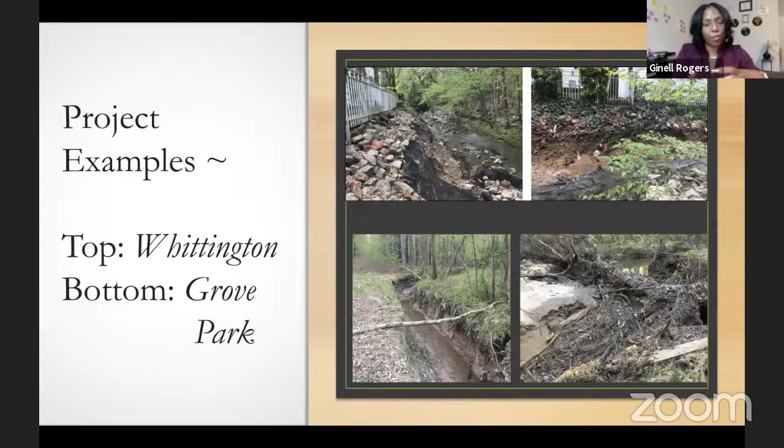Currently we have a Whittington project that is funded on the state level, doing water restoration, and the same with Grove Park. These two are HOA communities that we are contracted with, again with the state and also current contractors, to be able to do restoration work with these streams.

We also have some educational programs that we contract out as well. Currently, one is funded through the Triangle Community Foundation. This program is located in Orange and Chatham County, and this is our outdoor science lab.

Next, we also have a Beechtree Black Creek restoration project, and we currently have partners with Wake County Soil and Water District, as well as our partners Kris Bass Engineering and Fluvial Solutions. They help us do the groundwork there, and we are funded with the North Carolina Land and Water Fund, the North Carolina 319, and also the HOA match.

One of the questions I hear a lot is how does one get in contact with us regarding a potential project or need some assistance with a project? Our council members consist of a representative from each county, as mentioned earlier today.

Normally, the council members will bring potential projects to our board meetings. We would talk about those particular projects and what funding may be available to help assist with the particular project you need assistance with. All of our council members are spread out across those 10 counties, but we're all skilled in the work that we provide to the community. Each council member understands that there are different fundings available to carry out your project.

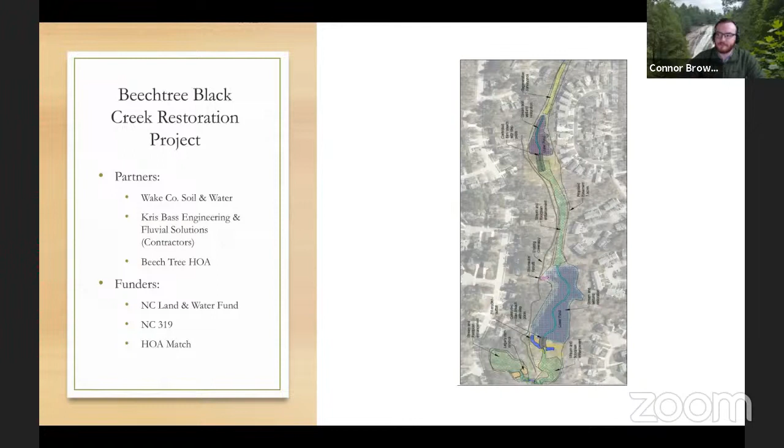Definitely, thank you for that. We don't do a lot of the hands-on work as far as understanding all of the specs. That's what we have you guys as engineers for, to help us create this design and understand what that looks like. But bringing the project or the example to PCC, we actually walk the grounds of the locations with our engineers and contractors just to be able to see the work that goes into the actual project.

As a grant writer, it's helpful for me to be able to see what the issues are, to be able to communicate that in writing in that particular grant proposal, but then also to put together a proposal to bring to our council members. Again, with our county reps, they are more familiar with some of the challenges that are faced with you all as homeowners and just some of the streams in general. Stream restoration is not my background, but managing grants is. So just being able to understand what the needs are, what the funders are looking for in reference to the writing, what outcome measures that we're actually going to present or try to solve, all of that information, all of those points goes within the proposal.

And then sometimes it could take a little while to be able to understand if we're going to have all of the projects covered on behalf of one funding source, or sometimes there's multiple funding sources that will go in to a particular project like this Beechtree Black Creek restoration project to actually have the dream come alive. So that's one of the reasons why I indicated on the slide that you'll see funders like the North Carolina Land and Water Fund, the North Carolina 319, and then the match to be able to help to really put the project together.

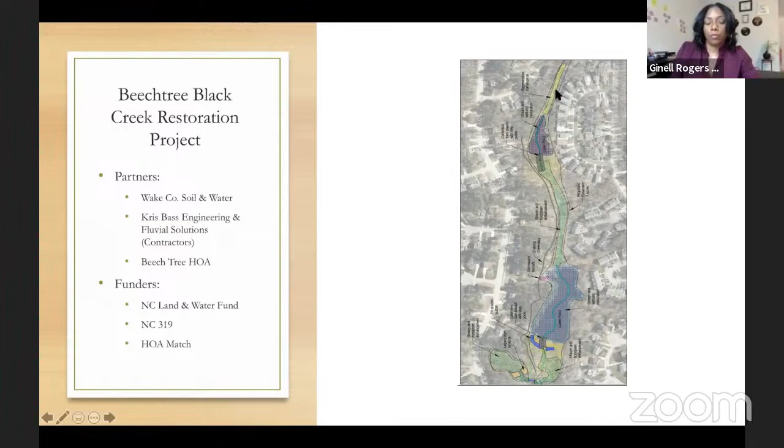So definitely, if there's a project that you have in mind, or you have a challenge in mind that you really want to present to your council or to the PCC as a council, definitely contact your local county government soil and water conservation department. As again, we have board members that sit in this particular department or associated with this department that can actually talk to you and get more insight on what your project idea is.

Once that happens, they will contact myself or our board chair or another council member to bring that project to us. We will do a little bit of research on the project. I may go out and also see the project just so I can have some understanding. We'll put together a proposal or a form of all of the interests that's going to be invested, what the project will actually seek to implement or to fix. And then we will have a huge meeting with our council members to discuss the projects in detail and also any funding that will go with it.

We will also bring our partners together. So that would be HOA, landowners. That would also be any partners that will actually be of assistance to carry out this project. And then again, look at those funding sources.

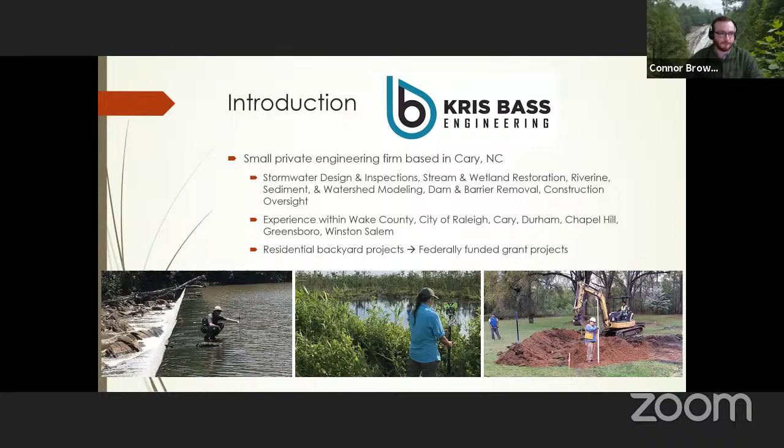Most every lot, when it's sold, has a set impervious limit in square footage that can't be exceeded. Impervious area is everything from your roof area, your concrete driveway, concrete sidewalks, patios. If you were trying to go over that limit, then some of the square footage has to be mitigated in runoff - the runoff has to be mitigated in a stormwater device. And that's what this project was for.

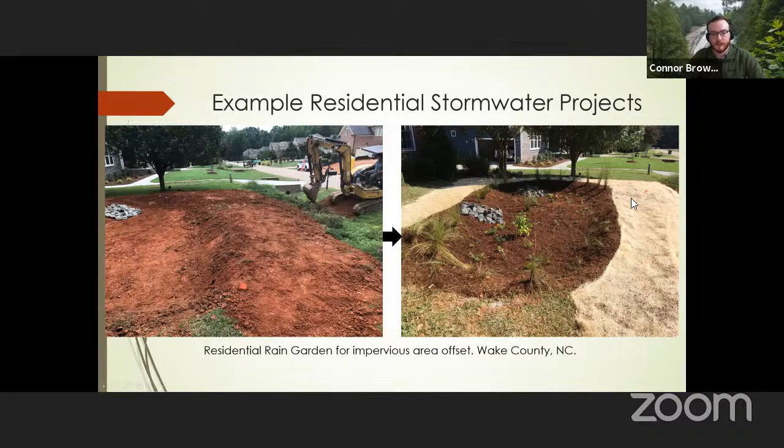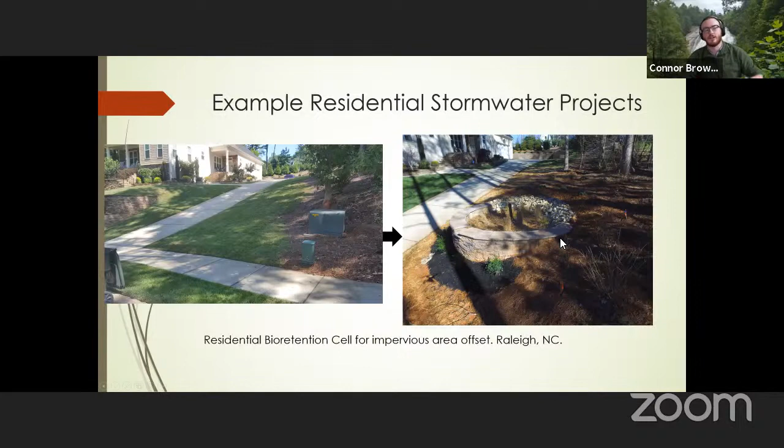Why I wanted to highlight this one is because it shows some of the constraints that every project is going to have, but it doesn't prevent you from putting together a good solution. The only space that this homeowner had available was in this very steep stretch right by their driveway. But we worked with a landscape contractor that has experience in hardscaping to design a retaining wall to overcome that vertical challenge - but similar situation for goal in the design.

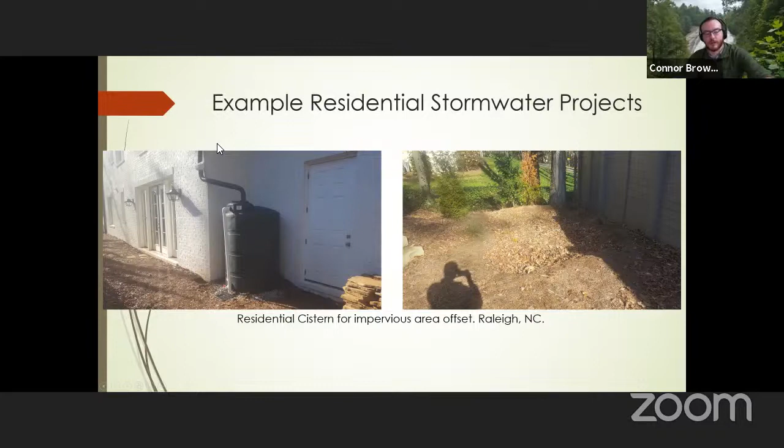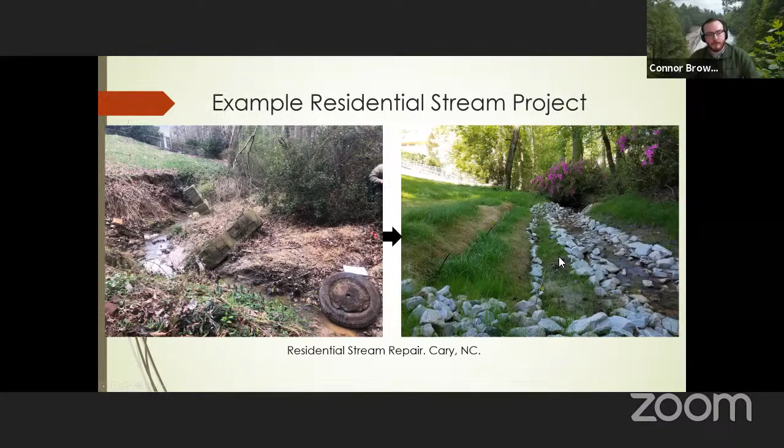So we came in and, using natural channel design principles, we can create both an aesthetically pleasing and ecologically positive solution out of it, and mitigate that bank failure slope, making it a feature for your property that's stable and aesthetically pleasing.

So I want to talk briefly about permitting requirements, because that's one of the things that catches homeowners off guard a lot. They have an idea in their head for a project they want to do, and then they don't realize the permitting battle that happens behind the scenes.

First, in talking about stream related projects like the one I just showed, if you have a stream in the backyard and you're thinking about doing some work on it, the first thing to do is understand the determination of the stream. There are 3 stream determinations: ephemeral, intermittent, or perennial. Ephemeral streams only flow when it's raining or shortly after — it's basically a drainage ditch. Intermittent streams flow for a portion of the year but are dry during the rest, and perennial streams have a constant base flow whether it's raining or not, for the most part, year round.

The reason that determination is important is because there are 2 governing permitting agencies we have to work with: the U.S. Army Corps of Engineers, the USACE, and the North Carolina Department of Environmental Quality's Water Resources Division. Both of them oversee, permit, and allow the work that happens in all intermittent and perennial streams. Any work involving discharge into those streams, earthwork in those streams, or impacting the area around that stream all goes through them for intermittent and perennial streams.

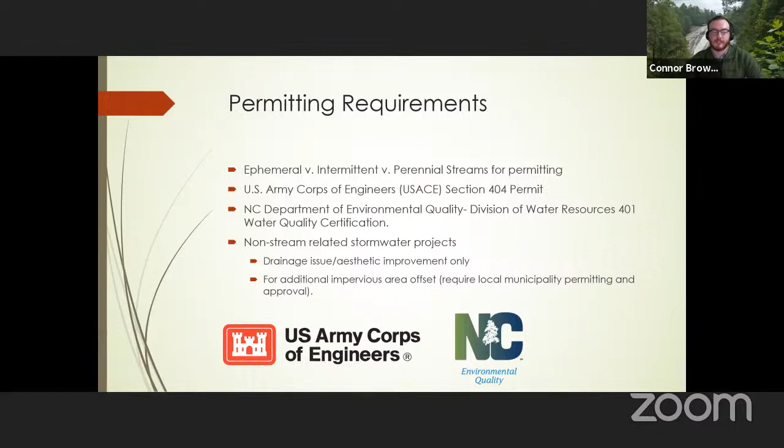Ginell talked about the grant side of funding projects. Some other ways we see residential projects funded: obviously individually funded, out of pocket by the homeowner. There's also opportunity if you have an HOA, or if the problem area you're identifying impacts multiple homeowners, to reach out to those neighbors and see if you can group fund a larger budget for a project, or reach out to the HOA — sometimes they'll be willing to work with you and contribute or take over part of the fees. There are also a few reimbursement programs.

I'm learning about them as they pop up, but one that comes to mind is in the City of Raleigh: the Raleigh Rainwater Rewards Program.

There are some stipulations, but they can, in some cases, reimburse homeowners up to 90% of project totals, so long as they meet the requirements. And then, like was said before, there are different grant programs. They're competitive, but it's good money to be used for larger projects, high impact projects. It can result in longer timelines on projects, and there are restrictions, but it's also a good way for those larger or high impact projects to secure funds.

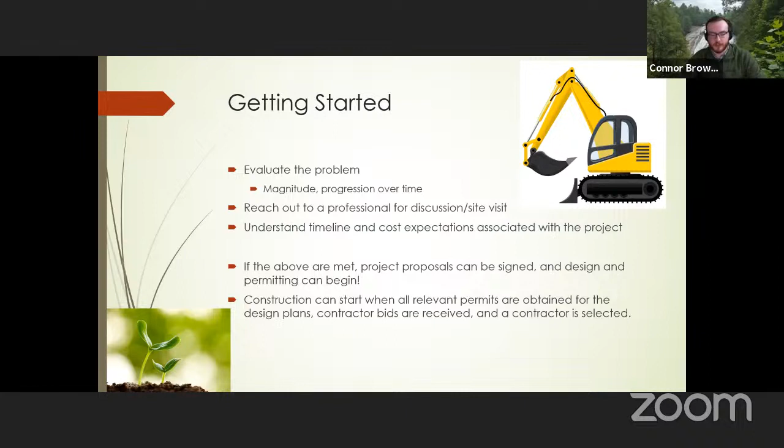Once that's met, you can sign project proposals, designs can start, and eventually construction can begin when all relevant permits are secured for the project. If you bring on a contractor, you get bids from various contractors and select one, and that's when ground can be broken.